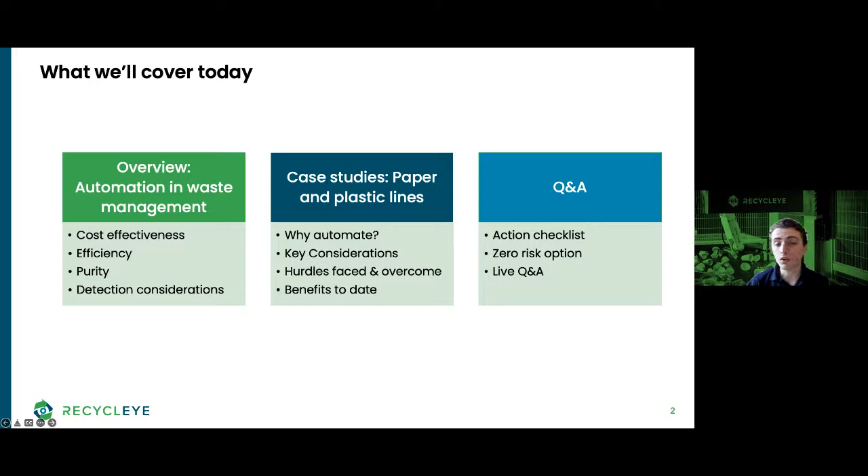Today's presentation will be split into three main sections. In the first one, Paloma will present an in-depth overview on how AI and robotics can be used in the industry. In the second, we'll do a deep dive with Jarek on his experience automating his manual quality control using robotics. And last but not least, we'll leave plenty of time for you to ask any questions.

But before we start, a quick overview on Recycleye for those that might not be familiar with us. Today, we're a team of 30 people. We're spun out of Imperial College London, where we still have very close ties and academics working with us every single year. We have a mutual exclusive agreement with the world's second largest robotic manufacturer, a company called Fanuc. Some of our backing comes from the likes of Microsoft, and we've also received some funding from both the European Union and the UK government. And on our board, we have people like Bernard Arambillet, the former chief executive officer of Veolia.

As a company, we've mainly focused on municipal household waste, and today have clients across Northern Ireland, England, France, Italy, Germany, and as of last week, our first system is going to be deployed in Australia. I'll now hand over to Paloma, who will talk about optimizing facilities using 21st century technology. Paloma, over to you. Thank you, Victor.

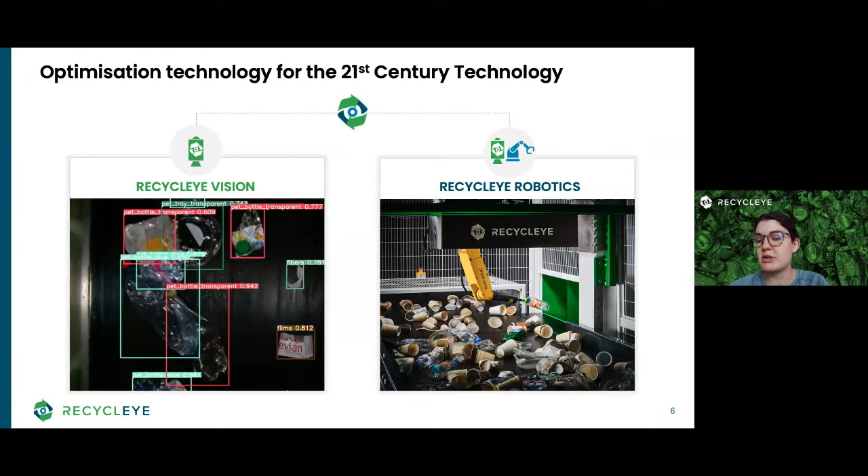Equipping robots with features like a 6-axis mechanism, path planning optimization algorithms, and empty pick detectors are some of the key incorporations that have been made possible through working closely with facilities and understanding how this technology can best support the sorting process to ensure optimal levels of operation.

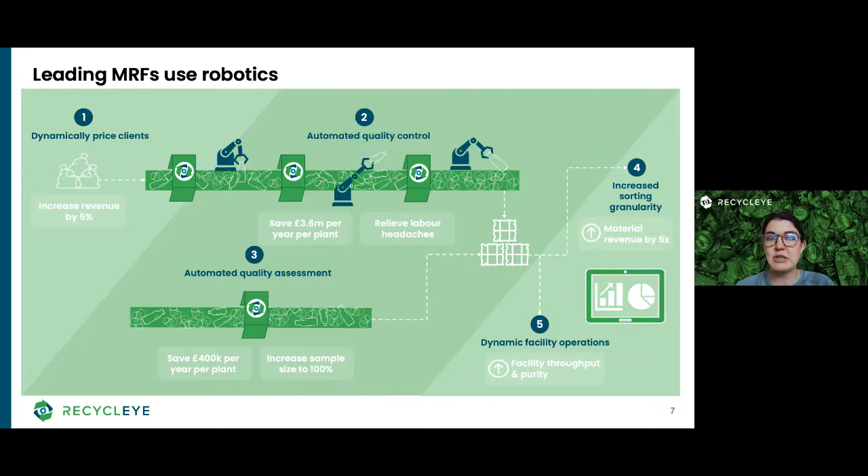This diagram shows where automation is driving value throughout MRFs, from fulfilling dynamic pricing based on stream composition to developing front-end solutions. Projects of this nature are increasing granularity in classifications. So if we translate into numbers, these aspects of automation translate into key benefits for facilities.

Manual pickers, for instance, naturally get tired over an 8-hour shift. With our vision systems monitoring this data, we were able to see that over an 8-hour shift, purity slowly decreases over time, and this is natural. As you can see in the little graph, robots completely resolve this challenge as they result in a consistent and highly reliable performance. In other words, there are no toilet breaks or holidays.

Robotic solutions improve margins through two other angles. First one, through the alleviation of labor overheads, which has resulted in over 10 million savings over a MRF's quality control lifetime. Allowing for 24/7 operations also results in something in the likes of 110% more throughput, which means waste treatment more than doubles. If we think big and scale this to all of Europe, we could absolutely double recycling rates, which is crazy.

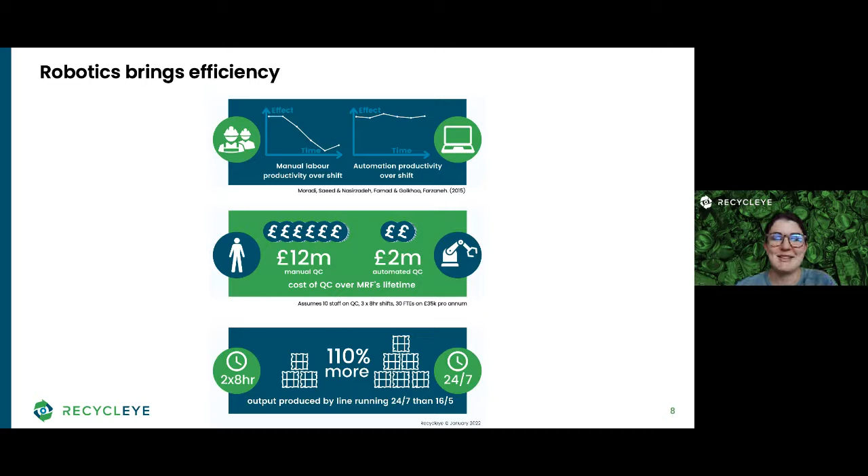AI automation brings effectiveness beyond other technologies. Let's take food grade versus non-food grade plastic differentiation as an example. If we think of food grade PP and PE today, there are no markets for these existing. AI has the ability to change that and transform a batch of PE, say costing 150 per ton, to PE food grade at 600 per ton, which is nuts.

We're currently working with Total and Valorplast in France for a similar application on this. In our latest results, we actually managed to remove 50% of the food grade PP with 97% purity on the stream. So here you're seeing a clear example of where AI comes into play.

We actually had a very interesting discussion with WRAP the other day, where we asked them to share their insights with regards to automated sampling. Some of the key benefits we discussed with them included the capacity to ramp up the sampling frequency without the need to find more space to store the bales and more manpower capacity. More importantly, the ability to get high accuracy on proportions and quantities, which provided much more visibility in a way that producers could pay a fair amount.

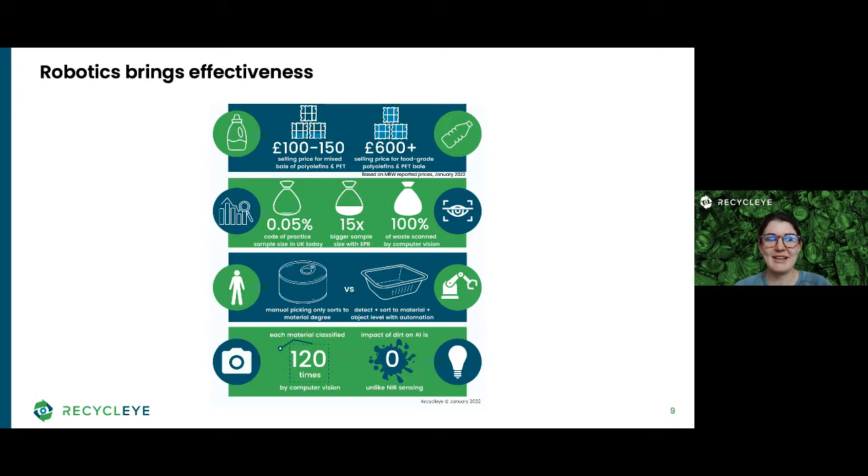Thank you, Paloma. So Bryson Recycling is the UK's largest social enterprise recycler based in Mallusk, Belfast. It was established almost 30 years ago and today runs 12 sites with 65,000 tons of household recycling being processed last year. The company employs 300 people and sorts half of Northern Irish household recyclables. More recently, Bryson took the decision to install a Recycleye robotic unit on their paper line to pick out material in 4 separate buckets, including Tetra Pak, brown board, aluminium cans, and plastic.

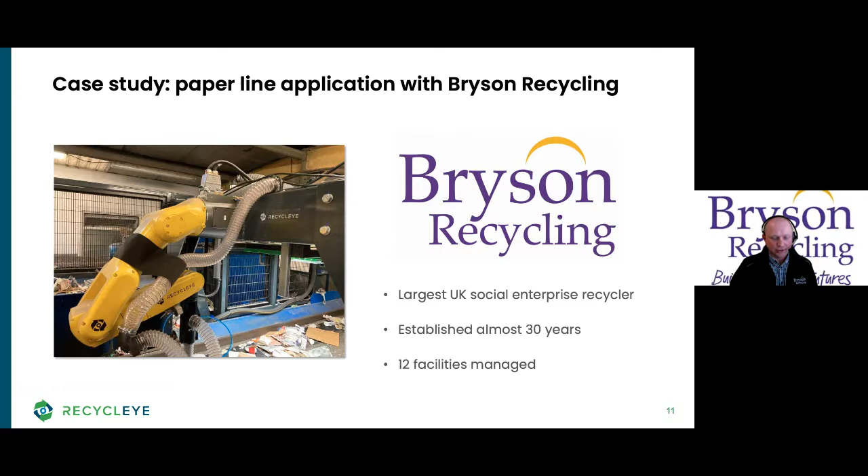So I have a few questions. I suggest we dive straight into them. Jarek, could you perhaps start by explaining why you chose to install a robot in your facility? First of all, as every company, I believe we are looking regularly onto the market, onto the equipment on the market, and also into the innovation that is possible.

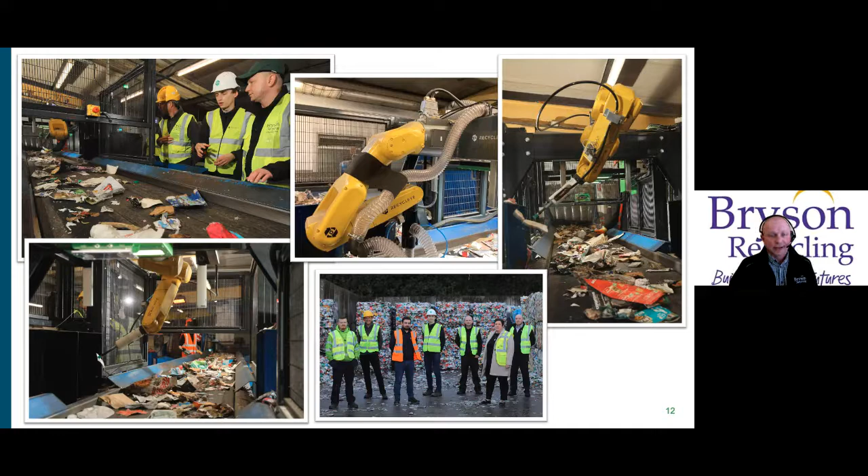And due to the design of the factory, the size of machinery and so on, it's very difficult for us to find a perfect machine that would nicely fit into the existing factory, into existing machinery. So for us, it was very important whenever we're making any changes, whenever we're making any improvements. First of all, installation. We needed to prove that we can do the installation over the weekend, not to disturb working hours, which was a very, very important part.

Secondly, we've been looking also for the right equipment, something that will really play a big, important role within the machinery. As well as any other factors that really took part in consideration of why to choose the robotic arm rather than everything else. And everything, I think, nicely came into the fact that we've got a new company, a UK company on the market, supplying exactly what we're looking for at the minute.

Okay, thanks. And could you perhaps share what the key investment considerations were? The main two points really were the product quality. We are trying to ensure that our segregated materials are to the highest possible quality that is needed for the buyers of materials. And secondly, we knew that the machine will be able to long-term replace also a person on the line, because we're working over two shifts a day plus some operations at night time. That ensures that the robot will nicely pay off within the time, as it will work 24 hours a day for 5 days a week.

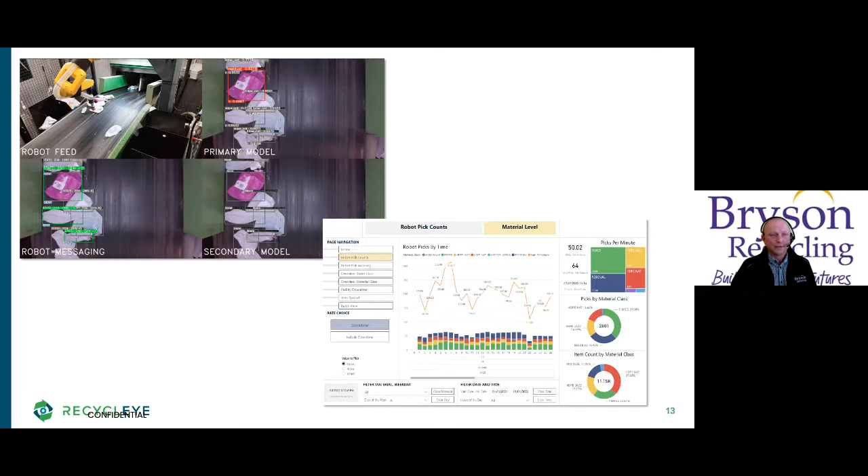Okay. You mentioned employees there. Could you share how the staff at the facility reacted to having a robot installed? Well, that's very interesting, because as many people as we've got in the factory, as many opinions. Some people were more keen to see additional equipment installed before the human sorting processes, basically another automation process installed on the line.

What was very good, and some people knew straight away how positive the result was going to be, is that the majority of picking could be done by the robot, and they would need to do only the final quality control after the robot, rather than picking more contamination.

So some of them have been really enjoying the changes within the factory. Some others completely opposite. The first thinking was straight away, oh, hold on, those robots will come in and will maybe push us towards the new jobs and so on. So I think it's all communication. It's all in communication. Whenever people are told of what's happening, what is the progress of exact plans for the company as well, I think they're going through it much easier, and those changes, they are needed, but again, they have to be really well communicated to staff of what is happening.

And did you have to fire anyone upon the installation of the robot? Nobody has been dismissed because we have implemented a robot on the line. We have reduced a position on the line with the natural movement of people. People in this field are coming and going regularly, so we just didn't replace the person that had gone, basically, from the position. Okay.

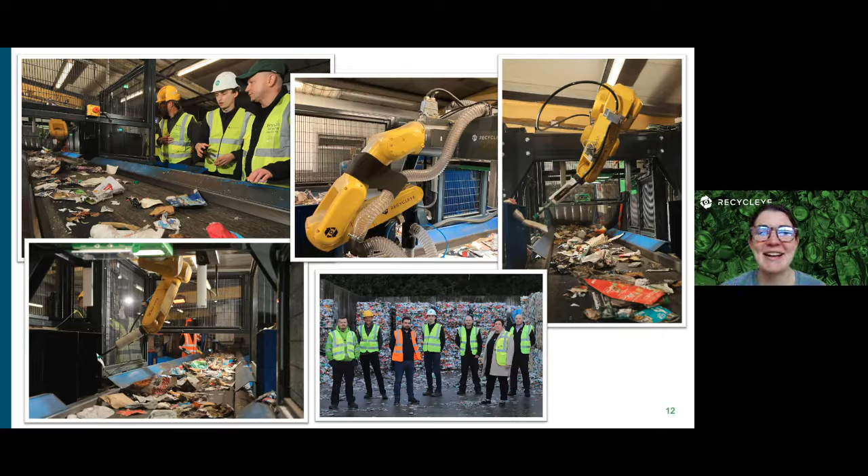And hi, everyone again. Just to complete our explanation of this technology, we thought it was a good idea to touch on a different application of the robot. In this case, we're no longer talking about a paper line like we were with Jarek from Bryson, but plastic. We wanted to highlight this because it showcases the flexibility that this technology has.

So this application, I don't know if you may be seeing my hands because it's a bit complicated to explain just with a picture, but it basically consisted of a line that was split in half. Many of you may know these sort of lines as it's quite common in MRFs. And basically half of the line was HDPE naturals and the other half was HDPE jazz.

So what the robot was doing was actually cross-matching the corresponding categories. So HDPE nats from the HDPE jazz stream, moving it to its corresponding half and vice versa, as well as removing residuals from both sides.

So out of these two target streams, the outcomes were absolutely smashing. We surpassed the expectations by far. Actually, we achieved 99% purity in HDPE nats. And yeah, so this is just very briefly touching on this, showing that these outcomes absolutely justify the need for artificial intelligence in waste, of course, complementary to other technologies, such as optical sorters, as we aim to push the boundaries in terms of purity, efficiency, and granularity.

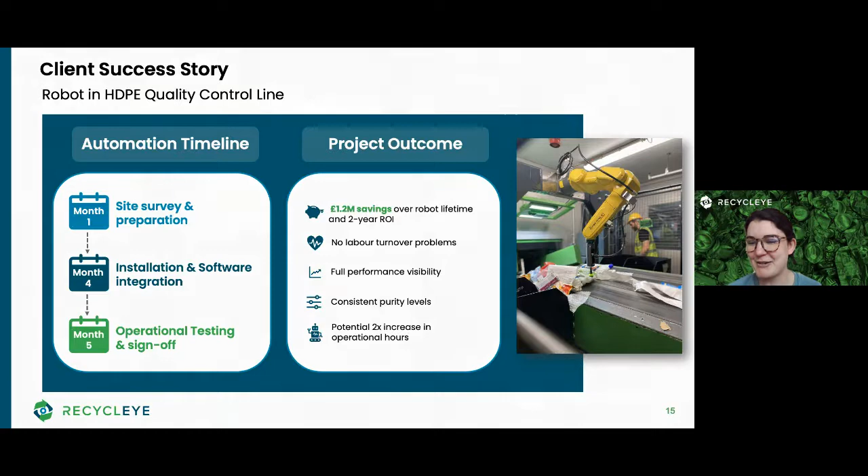Fantastic. So we spoke about robotics in different circumstances. Overall, it's clear that AI and automation has a few high-level advantages. The first is obviously you reduce your labor turnover and no longer have sort of labor shortage problems. It leads to a reduction in overhead. Automating quality control can save up to £3.6 million per year per facility.

On top of that, the automation of the quality assessment, which is the sampling, can also save up to 400,000 a year for some of the larger facilities. It gives you the opportunity to move towards 24/7 operations, which if you operate on 2 8-hour shifts, means that you can almost double your total throughput. Ultimately, it's about better performance and more consistency and reliability in your waste streams, as well as characterizing that waste and bringing some more visibility and traceability to your own operations.

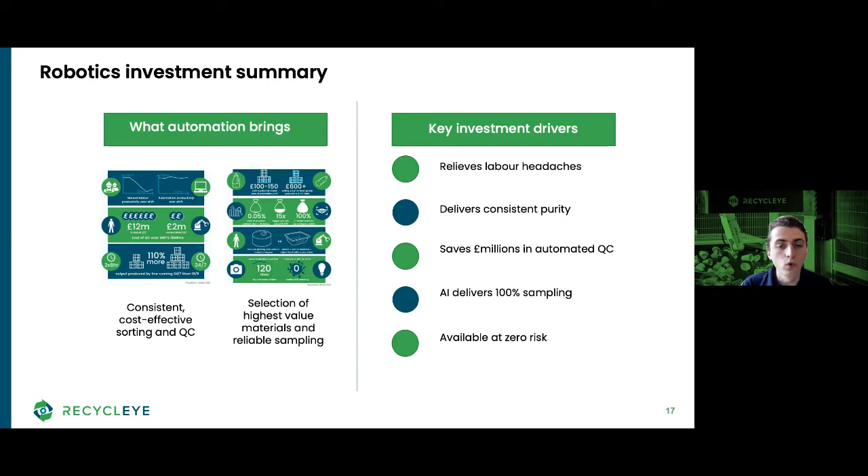I just want to finish off with essentially a bit of a story of how we actually got to work with Jarek. It was a year ago. Recycleye set up what was called an early innovator program, which offered early access to this new technology and preferential access to the team. Bryson was given a slot on the program in big part because of Jarek's hands-on approach, from which we were sure to get tons of feedback, on top of which we could build.

Now that the whole system is out of R&D and fully productionized, essentially how can you automate and have a risk-free transition to benefit from all the systems we've just talked about? Well, for that, we set up what's called the Zero Risk program. So this one is structured slightly differently, but it essentially allows you to transition to automation without any risk. That means that Recycleye comes to your site, installs a robot free of charge, so you don't pay for install, neither for the purchase.